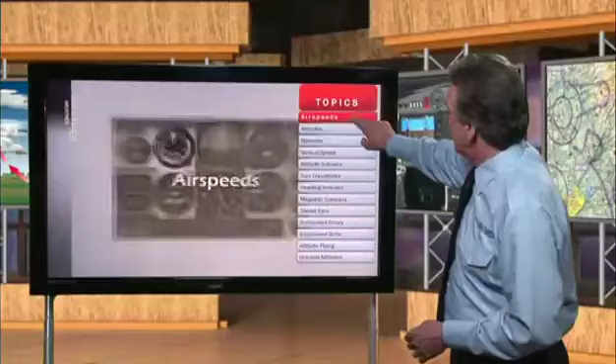We'll cover these topics: airspeeds, altitudes, altimeter, vertical speed, attitude indicator, turn coordinator, heading indicator, magnetic compass, slave gyro, instrument errors, instrument skills, attitude flying, and unusual attitudes. Okay, let's move into the classroom with our first topic: airspeeds. Join your instructor now.

Hi, I'm Robert Bremer, your instructor for this lesson on flight instruments. Flight instruments are the key component of IFR flight. In fact, flight in IMC would be impossible without these instruments. The first instrument we'll discuss is the airspeed indicator. It's part of the pitot-static system, which we'll discuss in greater detail later. Here we have a simplified diagram of the pitot-static system to which the airspeed indicator is connected. The airspeed indicator is connected directly to the pitot tube.

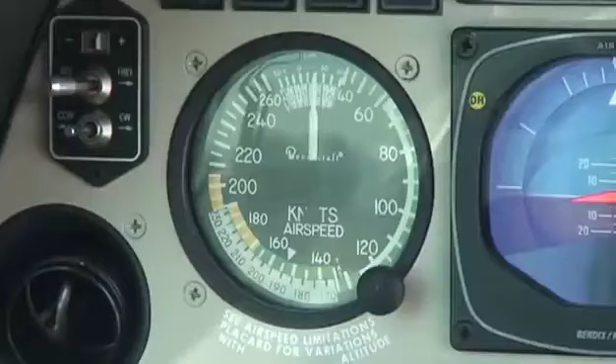So let's take a look at the inner workings of an airspeed indicator. The ram air enters the pitot tube and pressurizes this diaphragm. The diaphragm drives airspeed indicator hands through a mechanical coupling consisting of a long lever and this sector gear. So let's take a look at some common types of airspeed indicators that are found in general aviation airplanes. First is a true airspeed indicator, like the one you see here. A true airspeed indicator allows the pilot to correct indicated airspeed for non-standard temperature and pressure.

Next is a maximum allowable airspeed indicator with a movable pointer indicating the never exceed speed, which changes with altitude. And finally, we have a Mach meter, which shows the ratio of the true airspeed to the speed of sound the aircraft is flying. So let's take a look at some definitions of a typical airspeed indicator. We'll take a closer look at the color coding.

You'll notice that there's a series of color-coded arcs on the airspeed indicator. There's a white arc, green, yellow, and then we have this red line right here. These are airspeed limitation ranges or operating limits of your airplane. Depending upon what airplane you fly, the arcs may shift to different airspeeds, but you'll see these colored arcs on each and every airplane you fly.

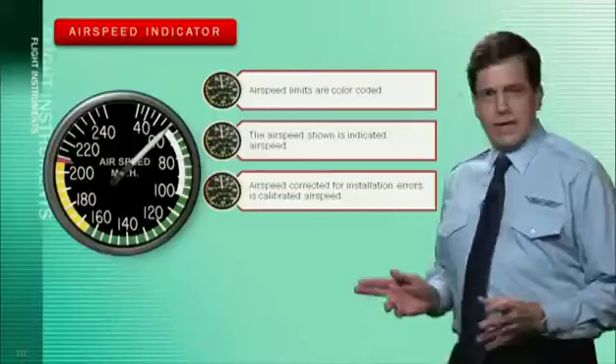Indicated airspeed is that speed that's read directly from the airspeed indicator. Now, airspeed that is corrected for installation and instrument error is called calibrated airspeed. And true airspeed is calibrated airspeed that's corrected for variations in temperature and pressure. And finally, the Mach number is that ratio of true airspeed to the speed of sound. Let's study airspeed limitations. The white arc, which you see right here, represents the flap operating range.

At the bottom of the white arc, or at the lower speed, is the airspeed limitation called VSO. The V stands for velocity, or speed, and the S stands for stalling, and the O stands for a certain configuration. In this case, that configuration is the lowest possible airspeed you can have with the flaps and landing gear down, or in the landing configuration. Below this airspeed, in the landing configuration, the airplane will stall.

Now we also have VS1. V is for velocity, S is for stall, but this is configuration 1, meaning the flaps are up, or in a clean configuration. If you fly below this airspeed with your flaps still up, the airplane will stall. Remember: VS1 is a stalling speed in a clean configuration, or stuff in. VSO is a stalling speed in a landing configuration with flaps and gear down, or stuff out.

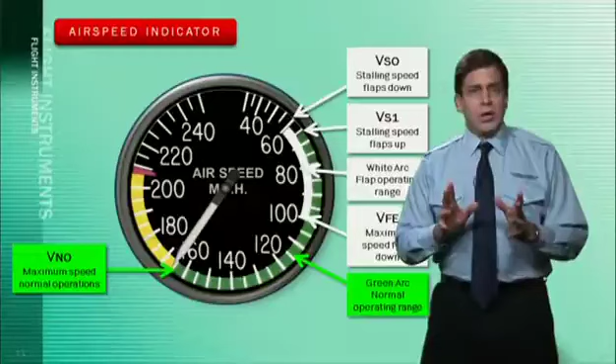We also have this green arc, which represents the normal operating range. At the top of the green arc is VNO, the highest airspeed you should fly under most operating parameters. You can, from time to time, fly into the yellow arc if the air is very smooth, but just like a street light, remember yellow means caution. If the air is bumpy, you want to reduce your speed to fly in the green arc.

The yellow arc represents caution. Operating in this range requires caution, and as mentioned earlier, you should only fly at these speeds in smooth air. At the very top of the yellow arc is the red line, right here. This is VNE: V for velocity, N for never, and E for exceed. Never exceed speeds above this red line can be very dangerous. If you fly above this speed, you risk the likelihood of structural damage to the airplane.

There are also some airspeed limitations that are not marked on the airspeed indicator, but you need to know them just the same.

VA is maneuvering speed. Maneuvering speed is that speed at which you may move the flight controls to their maximum fore and aft deflection and not produce any structural damage to the airplane. VA, or maneuvering speed, can be found in the pilot's operating handbook for the particular airplane that you're flying.

Another airspeed limitation not depicted on the airspeed indicator is VLE, the maximum landing gear extension speed. This is the maximum speed at which you can safely lower the landing gear if you have an aircraft with retractable landing gear. Again, this speed is found in the pilot's operating handbook.

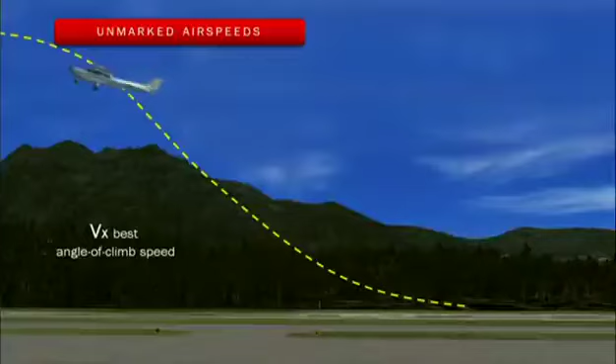Let's take a look at an example. Here our airplane is rolling for departure, but you'll notice there's a group of trees at the end of the runway. If you have an obstruction at the end of the runway, you need to make sure you can climb out at VX, the best angle of climb speed. This airspeed allows the airplane to gain the greatest amount of altitude in a given distance.

Now here's an example of VY speed. When your objective is to gain the most altitude over a given unit of time, you use VY. Generally, once you've cleared the obstructions, you can use VY, the best rate of climb.

Okay, let's take a break right now for a review question. This one: what information does a Mach meter present? Have a look at A, B, or C as your answer.

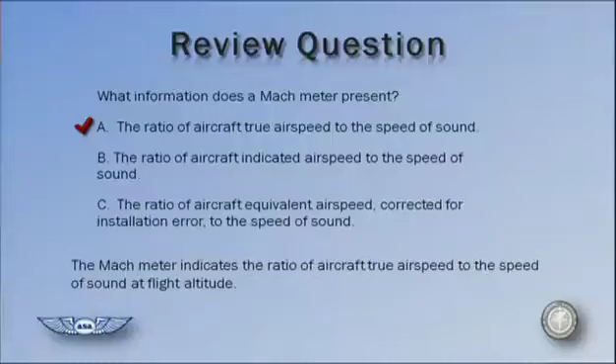Well, the answer in this case is A. The Mach meter indicates the ratio of aircraft true airspeed to the speed of sound at flight altitude.

Okay, let's move along to another topic: altitudes. Back into your classroom to join your instructor. Our flight altitudes are an important aspect in both VFR and IFR operation. Aviators define altitudes based on a number of factors determined by both physical properties and regulations. In this section, we'll study types of altitudes.

Let's talk about the various types of altitudes. Here's an overview of the various altitudes you need to know: there is indicated altitude, then pressure altitude, followed by true altitude, density altitude, and finally absolute altitude. Let's cover these in greater detail.

We'll start with indicated altitude. Indicated altitude is simply the altitude that's shown on the face of your altimeter.

Remember this: atmospheric pressure decreases an inch for every 1,000 foot altitude increase. So if our altimeter is set to 29.15 inches and a new altimeter setting of 29.85 inches is entered, representing a change of 0.7 of an inch, this equals a change in altitude of 700 feet.

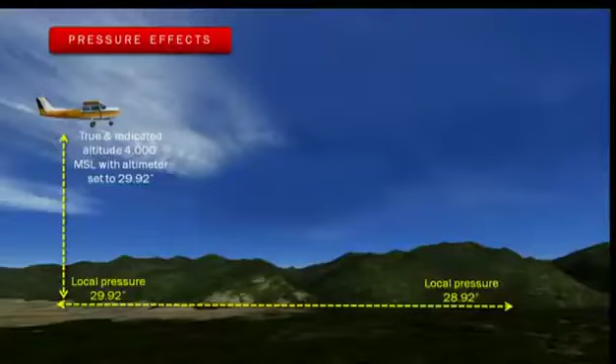In the first case, the local pressure and altimeter setting agree, with a true and indicated altitude of 4,000 feet. As the aircraft flies toward the lower pressure, but without resetting the altimeter, the indicated altitude and true altitude differ by 1,000 feet. So you want to remember the wise old saying: when flying from high to low, look out below.

A correctly calibrated pressure altimeter indicates true altitude above mean sea level, or MSL, when operating within the International Standard Atmosphere, or ISA, parameters of pressure and temperature. Non-standard pressure conditions are corrected by applying the local area altimeter setting.

Next, let's take a look at true altitude. True altitude is the vertical distance of the airplane above mean sea level, or MSL. Airports, terrain, and obstacle elevations on aeronautical charts are true altitudes.

Density altitude is pressure altitude corrected for non-standard temperature, which is 59 degrees Fahrenheit. Since you'll often be flying in non-standard conditions, you need to know and understand density altitudes and how they affect your airplane's performance.

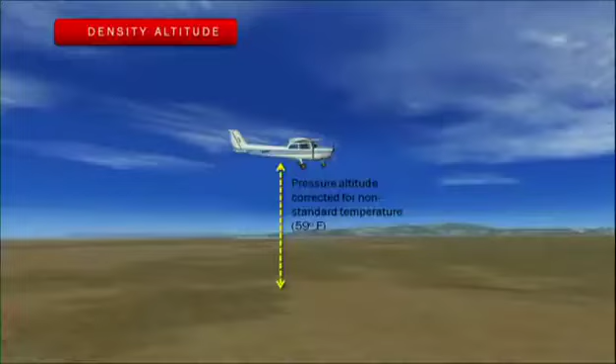Absolute altitude is the vertical distance of your airplane above ground level, or AGL.

When the aircraft is flying in air that is warmer than standard, the air is less dense, and the pressure levels are further apart. When the aircraft is flying at an indicated altitude of 5,000 feet, the pressure level for that altitude is higher than it would be in air at standard temperature, and the aircraft is also higher than it would be if the air were cooler. If the air is colder than standard, it is denser, and the pressure levels are closer together. True altitude is higher than indicated altitude whenever the temperature is warmer than ISA.

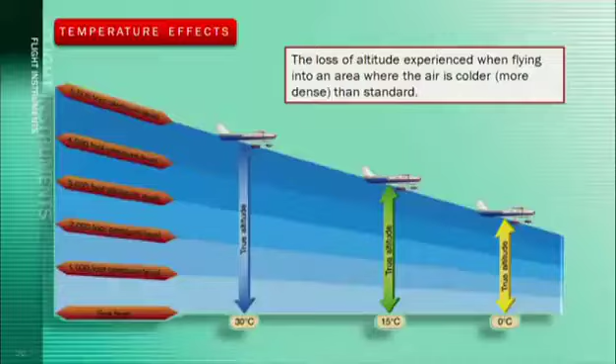Now in this example, let's assume we are flying in temperatures outside of ISA parameters. Here we're flying with an indicated altitude of 10,000 feet. The local pressure remains at the standard condition of 29.92 inches. We're flying in warmer than standard air. Because the air is less dense and the pressure levels are further apart, the altimeter reads 10,000 feet, but the true altitude is 11,000 feet.

The cold temperature-induced altimeter error may be significant when considering obstacle clearances when temperatures are well below standard. You may want to increase your minimum terrain clearance altitudes, with a corresponding increase in ceiling from the normal minimum, when flying in extreme cold temperature conditions.

Now, if compensation is applied, ATC must be informed that the aircraft is not flying the assigned altitude. Otherwise, vertical separation from other aircraft could be reduced, creating a potentially very hazardous situation.

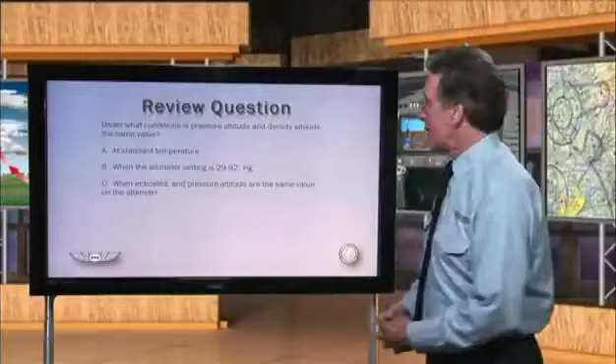Okay, let's take a look at a couple of review questions this time. First, under what conditions is pressure altitude and density altitude the same value? Which of these three?

Your answer, of course, is A. Density altitude is pressure altitude corrected for non-standard temperature. Under standard atmospheric conditions, each level of air in the atmosphere has a specific density, and under standard condition, pressure altitude and density altitude identify the same level.

Okay, let's take that second question. Under what condition will true altitude be lower than indicated altitude with an altimeter setting of 29.92 inches of mercury? Which of these, A, B, or C?

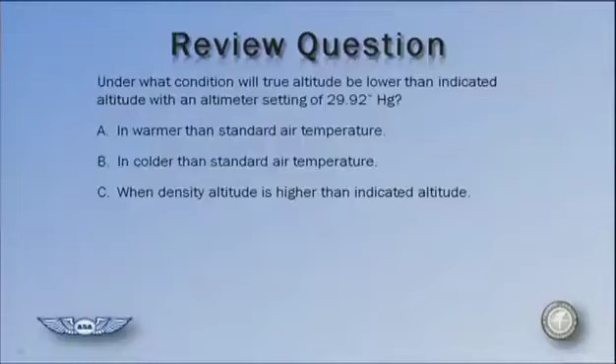The correct answer here is B, colder than standard air temperature. Effects of non-standard conditions can result in a difference of as much as 2,000 feet between true and indicated altitude on a cold day. So there you have it.

In this section, we study the altimeter as we find it in your instrument panel. It displays the altitude at which the aircraft is actually located, flying or otherwise. We'll learn its physical characteristics and how it's used. Next, let's take a look at the altimeter.

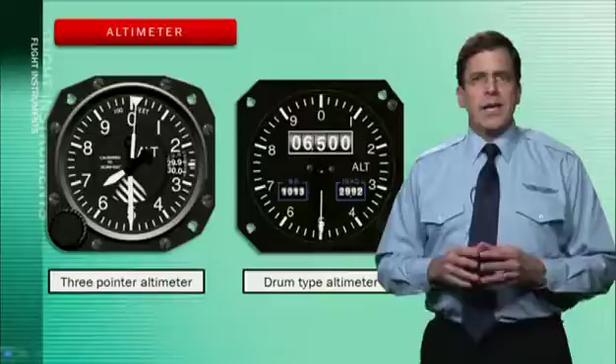Let's take a closer look at the altimeter. This little cut right here is called the Kollsman window, and it displays the altimeter setting. For example, if you departed from a controlled airport that has either a tower, ASOS, or ATIS information, you dial the altimeter setting in right here using this little knob.

If you're departing from an airport that does not have these services, you turn the dial to the field elevation from which you are departing. This will give you a fairly accurate barometric pressure indication.

Now, to preflight the altimeter, the current reported altimeter setting should be set in the Kollsman window. You would note any variation between the known field elevation and the altimeter indication. If the variation exceeds plus or minus 75 feet, the accuracy of the altimeter is questionable, and the problem should be referred to an appropriately rated repair station for evaluation and possible correction.

Let's take a closer look at the altimeter pointers. Aside from incorrectly setting an altimeter, one of the most common errors is simply misreading it. Now, just like a wristwatch, we have three hands, but instead of hours, minutes, and seconds, we have a 10,000 foot indicator, a 1,000 foot hand, and a 100 foot hand.

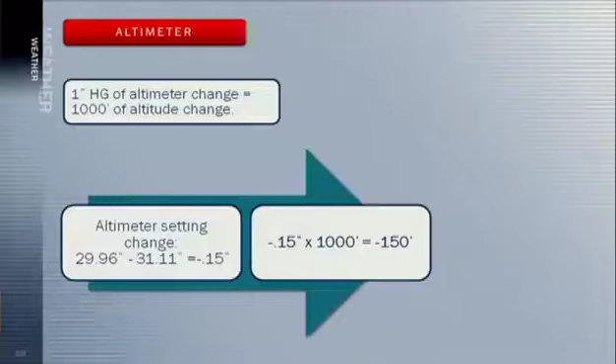First, when an altimeter is changed from 30.11 inches of mercury to 29.96 inches of mercury, in which direction will the indicated altitude change, and by what value? Which of these three, A, B, or C, is correct? Well, in order to get there, we have to do a little math. Given that 1 inch of mercury of altimeter change equals 1,000 feet of altitude change, we take 30.11 inches away from 29.96 inches, we arrive at negative 0.15 inches. We multiply that by 1,000 feet, we get negative 150 feet. Going back to our question, the correct answer is B: the altimeter will indicate 150 feet lower.

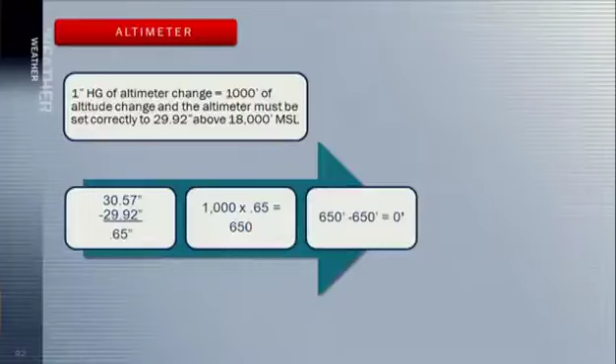All right, let's move along to the second one. En route at flight level 290, the altimeter is set correctly but not reset to the local altimeter setting of 30.57 inches of mercury during descent. If the field elevation is 650 feet and the altimeter is functioning properly, what is the approximate indication upon landing? Okay, which of these three? I'm going to have to do some more math. Given 1 inch of mercury of altimeter change equals 1,000 feet of altitude change, and given the altimeter must be set correctly to 29.92 inches above 18,000 feet MSL, we take 29.92 inches away from 30.57 inches, we come up with 0.65 inches. Multiply that by 1,000 feet, we get 650 feet. Taking away our field elevation of 650, our answer is C, sea level. Given the altimeter was not set to the field elevation pressure, the altimeter will read sea level, or 0 feet.

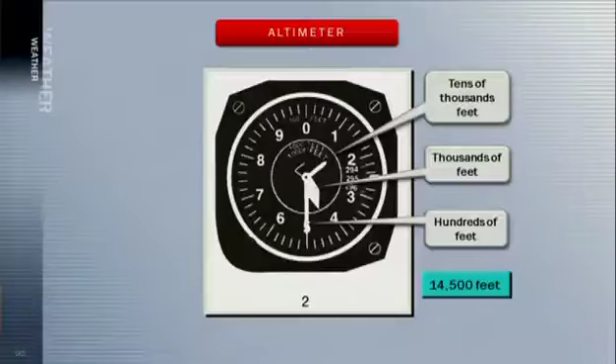14,500 feet, correct. Let's go back to our question. The answer then is C. It should be 14,500 feet, and that is correct. Okay, moving on to another topic.

Vertical speed is the topic. We'll go back to your classroom and your instructor. Next up is the VSI, or vertical speed indicator. It's also called a vertical velocity indicator, or VVI, and was formerly known as a rate of climb indicator. It's a rate of pressure change instrument that gives an indication of any deviation from a constant pressure level. The vertical speed indicator, or VSI, is also part of the pitot-static system. It's connected to the static side of the system.

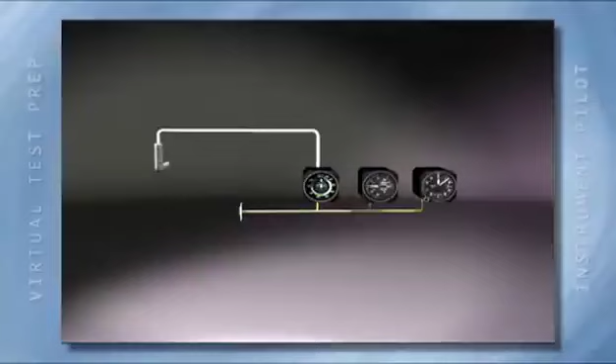The VSI, formerly known as a rate of climb indicator, is a rate of pressure change instrument that gives an indication of any deviation from a constant pressure level. The vertical speed indicator measures the rate of climb or descent in hundreds of feet per minute: 500, 1,000, 1,500, or minus 500, minus 1,000, minus 1,500, and so on. Although not required by regulation to be on board, the VSI is commonly found on instrument-equipped airplanes. To pre-flight the VSI, you would check to make sure that there's a 0 reading prior to takeoff. If it's indicating a climb or descent, you would note the error and apply it to the readings in flight.

The VSI, or rate of climb indicator, is a very sensitive altimeter with a calibrated leak in the case. Inside the instrument case is an aneroid very much like the one you would have in an airspeed indicator. Now, both the inside of this aneroid and the inside of the instrument case are vented to the static system. But the case is vented through a calibrated orifice that causes the pressure inside the case to change more slowly than the pressure inside the aneroid. It uses the static source as the sensor.

As the aircraft ascends, the static pressure decreases. The pressure inside the case compresses the aneroid, moving the pointer upward, showing a climb and indicating the rate of ascent in number of feet per minute, or FPM. When the aircraft levels off, the pressure no longer changes. The pressure inside the case becomes equal to that inside the aneroid, and the pointer returns to the horizontal or 0 position. When the aircraft descends, the static pressure increases and the aneroid expands. This moves the pointer downward, indicating a descent.

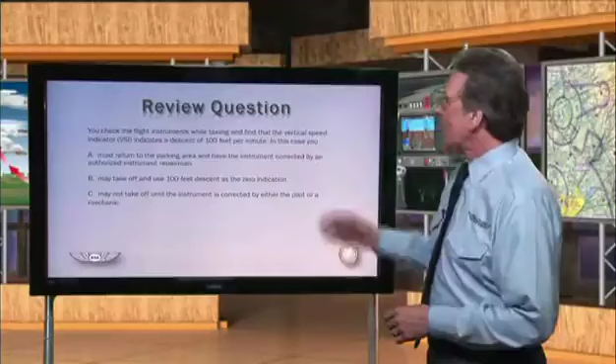Welcome back. Let's take on another review question for you. You check the flight instruments while taxiing and find that the vertical speed indicator, or VSI, indicates a descent of 100 feet per minute. In this case, you would take which of these actions, A, B, or C?

And your answer? B. The VSI should indicate 0 plus or minus 100 feet on the ground. Okay, moving along to another topic.

This time out, attitude indicator. We ask you to join your instructor in the class. Flight without reference to a visible horizon can be safely accomplished by the use of gyroscopic instrument systems and the 2 characteristics of gyroscopes, which are rigidity and precession. These systems include attitude, heading, and rate instruments along with their power sources. These instruments include the attitude indicator, turn coordinator, and the heading indicator.

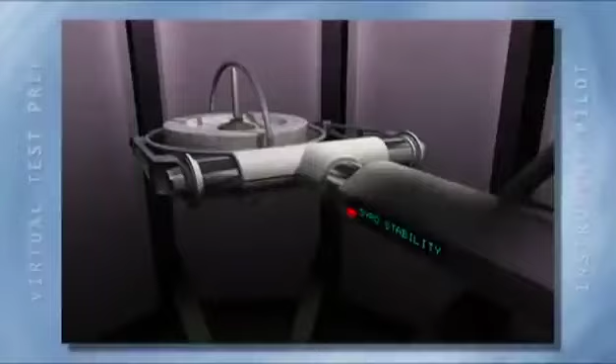A gyroscope, or gyro, is a small wheel with its weight concentrated around the periphery. When this wheel is spun at very high speeds, it becomes rigid and resists tilting or turning in any direction other than around its spin axis. It takes on a property called rigidity in space. Because of this effect, the gyro does not tip but stays upright.

When the gyroscope is mounted inside a gimbal device, that gimbal mechanism is moved around its 3 axis points. The gyro will still stay rigid. When this gyro is mounted in an aircraft, the gyro remains rigid in space and the aircraft rotates around it. In the airplane, the instrument will have a constant reference in space as the airplane pitches, rolls, and yaws around it. Attitude and heading instruments operate on the principle of rigidity.

Now, rate indicators, such as turn indicators and turn coordinators, operate on the principle of precession. The gyro precesses, or rolls over, proportionate to the rate the aircraft rotates about one or more of its axes. Here is a spinning gyro. As force is applied to this point right here with the red dot, the force advances 90 degrees, and that's where it's applied. And this causes the gyro to tilt in that direction.

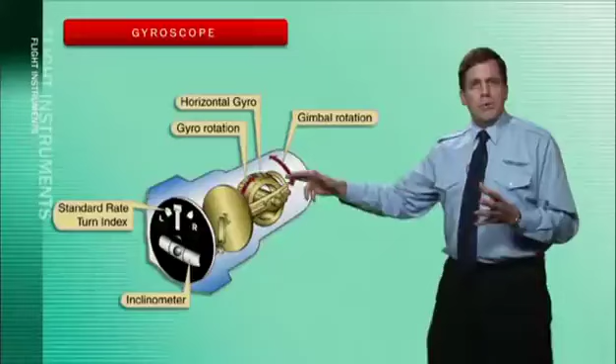Pneumatic gyros are driven by a jet of air impinging on buckets that are cut into the periphery of the wheel, as shown on this turn and slip indicator. On many aircraft, this stream of air is obtained by evacuating the instrument case with a vacuum source and allowing filtered air to flow into the case through a nozzle to spin the wheel.

Aircraft that do not have a pneumatic pump to evacuate the instrument case can use venturi tubes that are mounted on the outside of the aircraft, similar to the system that we see here. Air flowing through this venturi tube accelerates in the narrowest part, and according to Bernoulli's principle, the pressure drops. Now that location up there at the point of the venturi is connected to the instrument case by a piece of tubing.

The two attitude instruments operate on approximately 4 inches of mercury of suction. The turn and slip indicator, however, only needs 2 inches of mercury, so a pressure reducing needle valve is used to decrease the suction. Air flows into the instruments through filters built into the instrument cases. Now in this system here, we have a problem. Ice can clog the venturi tube and stop the instruments when they're most needed.

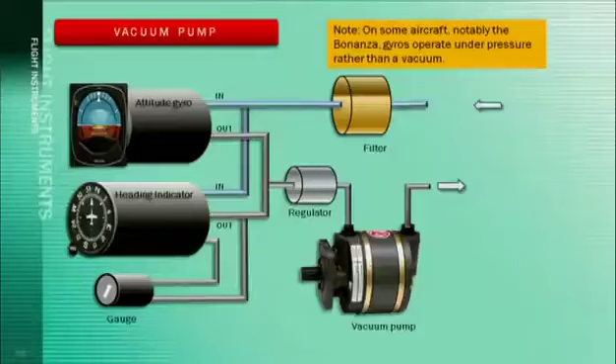So here's a typical vacuum pump system. This vacuum pump pulls air into and out of the gyro instruments. The vacuum pump is driven by the engine of the airplane. The air is pulled through a filter, and it comes out of the filter and then moves into the heading and attitude indicators. The air flows through the instruments and is evacuated through a regulator. The regulator maintains a constant rate of vacuum pressure moving into and through these instruments.

This gauge right here that you see on your instrument panel indicates how much vacuum pressure is applied to these instruments and being generated by your vacuum pump. After the air moves from the regulator and goes into the pump, it's vented overboard the airplane.

Now, there are other types of systems used in other aircraft. In some systems, instead of a vacuum, pressure drives the instruments. There's a pressurization system which is used on Bonanza aircraft as an example. A third type of gyro-driven instrument that's come out in recent years doesn't even use any of this. It's called a solid-state gyro.

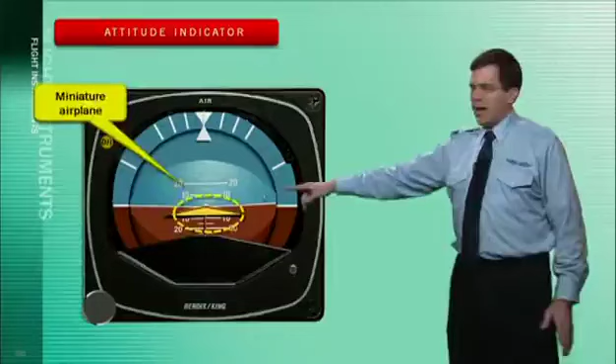What we see here is the business end of our attitude indicator, or artificial horizon. This is the face of the instrument. We have a miniature airplane, and it has wings, and they're indicating along this horizon. You can adjust the airplane up and down on the horizon with this little knob. Turning the knob allows you to align the miniature airplane with the horizon in the instrument.

A pre-takeoff check verifies that the horizon bar stabilizes within 5 minutes and does not dip more than 5 degrees during taxiing turns. These marks up here indicate bank angle from 0 degrees all the way over to a full 90 degrees of bank. Now, that's the attitude indicator, or artificial horizon.

The attitude indicator provides an immediate, direct, and corresponding indication of any change of aircraft pitch and bank attitude. This pitch and bank depiction is in relation to the natural horizon. It's the pilot's primary instrument during transitions of pitch. The attitude indicator is subject to some errors that you need to know about.

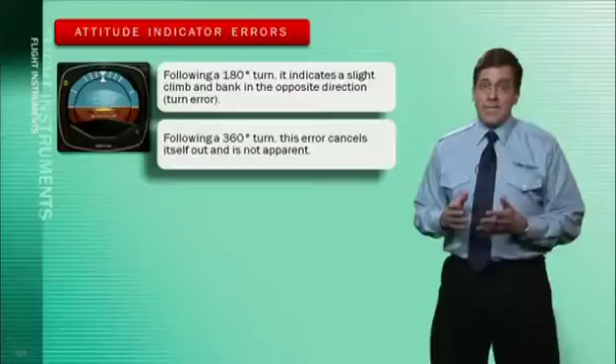These are: following a 180-degree turn, it indicates a slight climb and bank in the opposite direction. That's called turn error. Now, following a 360-degree turn, this error cancels itself out and it's not apparent. Also, during acceleration, the horizon bar moves down, indicating a climb. This is acceleration error. During deceleration, the horizon bar moves up, indicating a descent. That's deceleration error. Now let's take a look at some examples.

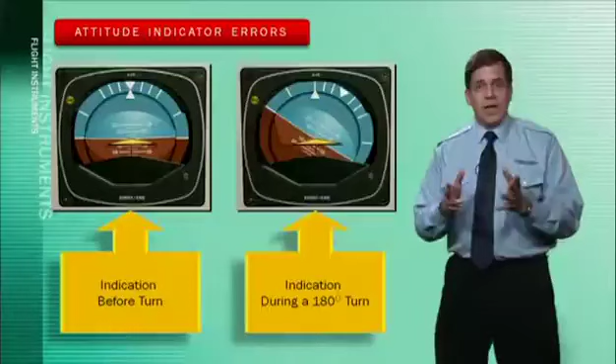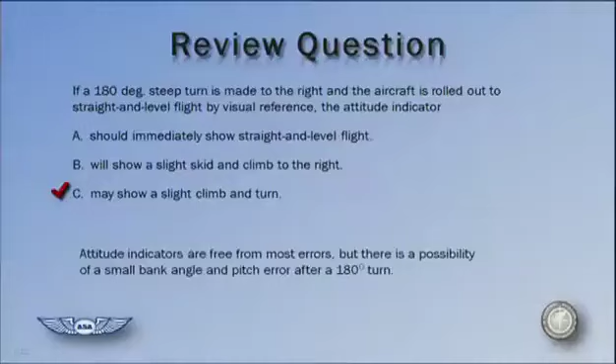If a 180-degree steep turn is made to the right and the aircraft is rolled out to straight and level flight by visual reference, the attitude indicator A, B, or C? And your answer is C. Attitude indicators are free from most errors, but there is a possibility of a small bank angle and pitch error after a 180-degree turn. Okay, let's move along.

Another topic. This one, turn coordinator. Back to your classroom. The next instrument that uses a gyroscope is the turn indicator. Before we discuss the turn coordinator instrument in detail, it's a good time to review the turning forces. Remember, an airplane turns because of the horizontal component of lift. The greater the horizontal lift, the greater the rate of turn.

In a turn, the angle of attack must be increased to maintain altitude. With reduced airspeed, you would decrease the bank angle or increase the angle of attack to maintain level flight. In a constant bank, airspeed increase results in a decrease in turn rate and an increase in radius. Check this animation. As the airplane enters the turn, a number of force vectors are created.

There's the vertical component of lift. There's a horizontal component of lift, followed by the centrifugal component of lift. These forces combine to create the resultant lift vector. Finally, remember that the load factor is the ratio between the resultant lift and the aircraft's weight.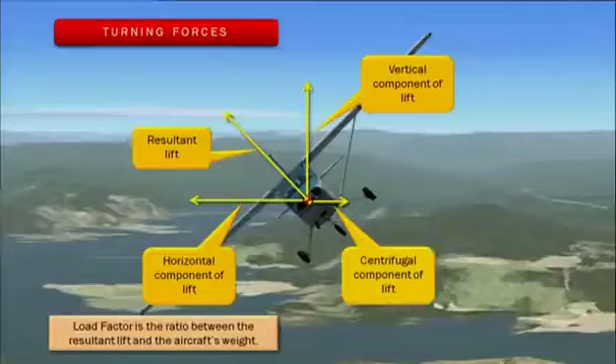The bezel of the instrument is marked to show wings level flight and bank angles for a standard rate turn. It's gyroscopically operated, designed to show roll rate, rate of turn, and quality of turn. It acts as a backup system for the vacuum-powered attitude indicator. Before engine start, the turn needle should be centered. During a taxiing turn, the needle indicates a turn in the proper direction and the ball shows a skid. The turn coordinator provides both yaw and bank information.

The little miniature airplane provides only an indirect indication of roll, responding with the airplane's banking action in some cases even before the turn can actually commence. However, in this case, the ratio of the turn is not 1-to-1 with the horizon like it is on the attitude indicator. This means that in a 30-degree bank turn, the miniature airplane will show a bank on the turn coordinator, but it may not show up as a 30-degree bank.

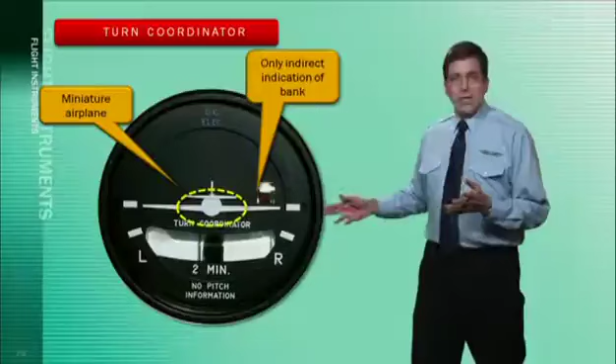At the bottom of the instrument is a little fluid-filled tube and ball. A turn coordinator does not sense pitch. This is indicated on some instruments by placing the words "no pitch information" on the dial. Now the inclinometer down here is called a coordination ball, which shows the relationship between the bank angle and the rate of yaw. In a coordinated turn, horizontal lift and centrifugal force are equal.

In a skid, the rate of turn is too great for the angle of bank and the ball moves to the outside of the turn. To correct this condition, increase the bank or decrease the rate of turn. The turn is coordinated when the ball is in the center, between the marks. The aircraft is skidding when the ball rolls toward the outside of the turn and is slipping when it moves towards the inside of the turn.

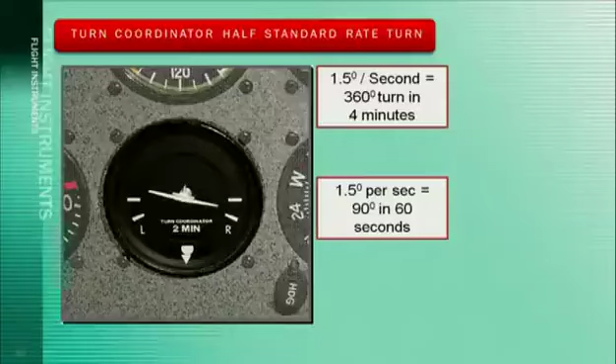Now, a standard rate of turn is 3 degrees per second. It takes 1 minute to complete a 180-degree turn. A half standard rate turn is 1.5 degrees per second. That takes 4 minutes to complete a 360-degree turn, or it takes 60 seconds to complete a 90-degree turn.

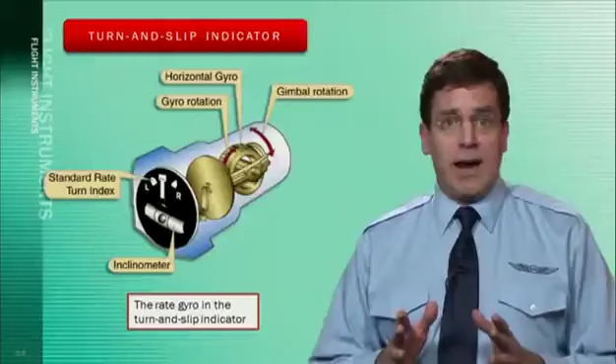The turn and slip indicator is a small gyro spun either by air or by an electrical motor. Note the horizontal gyro, gyro rotation, gimbal rotation, the standard rate turn index, and the inclinometer. The gyro is mounted in a single gimbal with its spin axis parallel to the lateral axis of the aircraft and the axis of the gimbal parallel with the longitudinal axis. The turn and slip indicator indicates yaw, but not roll.

Okay, this is a good time to review with a couple of questions what you just learned. If a standard rate turn is maintained, how long would it take to turn 180 degrees? Which of these is true and correct, A, B, or C? The answer is A. 3 degrees per second times 60 seconds equals 180 degrees. All right, question number 2.

What indication is presented by the miniature aircraft of the turn coordinator? Which of these is correct? Your answer? A. The miniature aircraft depicts an indirect indication of the bank attitude. Okay, selecting a new topic.

We're down to heading indicator, and we're back in your classroom for that topic. Next up, the heading indicator. The heading indicator is the final gyroscopic instrument. It basically provides the same information as the magnetic compass, but in a much better way. It does, however, require that it be set to match the magnetic compass.

Here we go. The last gyro instrument is the heading indicator. It looks very similar to a compass. The heading indicator shows the direction the nose of the airplane is heading. In this case, we're heading 341 degrees. The heading indicator is much easier to read than a magnetic compass using a heading adjustment knob. The heading indicator consists of a pictorial representation of an airplane that's moving along the compass rose.

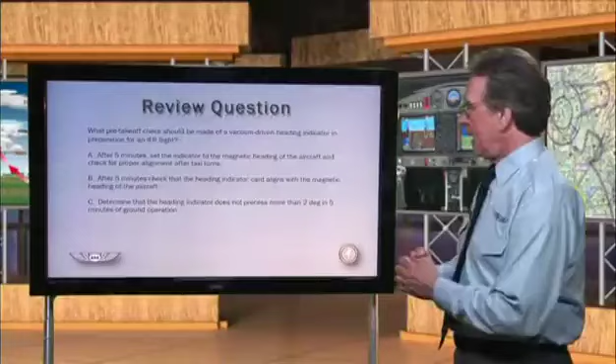Okay, back into the studio for a review question. What pre-takeoff check should be made of a vacuum-driven heading indicator in preparation for an IFR flight? Which of these is your correct answer? And our answer is A. After 5 minutes, set the indicator to the magnetic heading of the aircraft and check for proper alignment after taxi turns. Very good. Moving along, yet another topic.

We are down to magnetic compass. We ask you to join your instructor in the classroom. The last instrument we're going to study is the magnetic compass. The magnetic compass is not a pressure-driven or gyro-powered instrument, but it is perhaps the most important instrument there is. You have to know where you're going. The magnetic compass does, however, suffer from error tendencies.

As you know, the Earth has geographic and magnetic poles. Lines of magnetic force stretch between the north and the south magnetic pole. These lines of force are sensed by the magnetic compass. The magnetic compass points towards magnetic north. All general aviation aircraft are equipped with a magnetic compass.

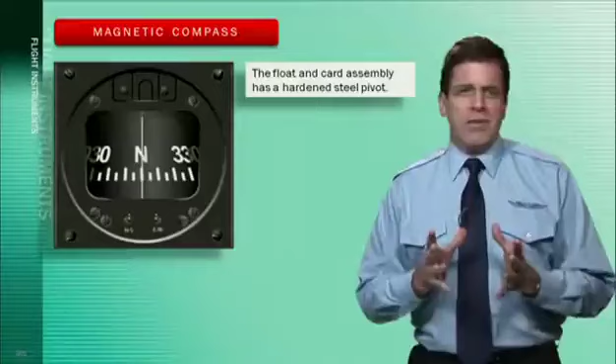The float and card assembly has a hardened steel pivot in its center that rides inside a special spring-loaded hard glass jewel cup. The buoyancy of the float takes most of the weight off the pivot, and the fluid damps the oscillation of the float and card. This jewel and pivot type mounting allows the float freedom to rotate and tilt up to approximately 18 degrees angle of bank. At steeper bank angles, the compass indications are erratic and unpredictable.

The compass housing is entirely full of compass fluid. To prevent damage or leakage when the fluid expands and contracts with temperature changes, the rear of the compass case is sealed with a flexible diaphragm or with a metal bellows in some compasses. The magnets align with the Earth's magnetic field, and the pilot reads the direction on the scale opposite the lubber line, which is this vertical line right here.

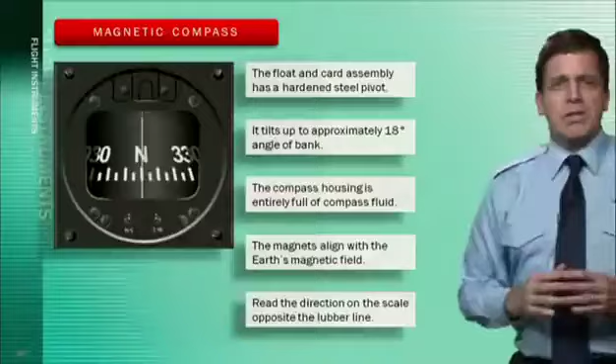A compensator assembly mounted on the top or the bottom of the compass allows an aviation maintenance technician, or AMT, to create a magnetic field inside the compass housing that cancels the influence of local outside magnetic fields. This is done to correct for deviation error. The compensator assembly has two shafts with ends that have screwdriver slots that are accessible from the front of the compass. Each shaft rotates one or two small compensating magnets.

The end of one shaft is marked EW, and its magnets affect the compass when the aircraft is pointed east or west. The other shaft is marked NS, and its magnets affect the compass when the aircraft is pointed north or south. Now, next up are compass errors.

Let's start with acceleration errors. First, assume that you're in the northern hemisphere and the airplane is on an east or west heading. The compass will swing to the north while you accelerate and then return to the correct heading. If the aircraft accelerates on a heading of east, the inertia of the weight holds its end of the float back and the card rotates towards the north.

As soon as the speed of the aircraft stabilizes, the card swings back to the east indication. If, while flying on this easterly heading, the aircraft decelerates, the inertia causes the weight to move ahead and the card rotates toward south until the speed again stabilizes.

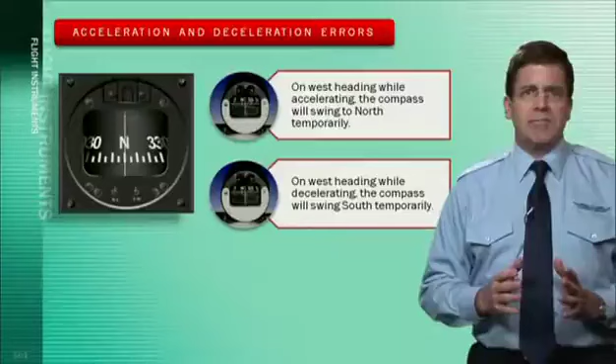So there's an acronym for this. Remember ANDS, which stands for accelerate to the north, decelerate to the south.

It occurs only on easterly or westerly headings. The compass will indicate correctly when accelerating on north or south headings.

Next, there are turning errors. The lines of magnetic flux leave the Earth at the magnetic North Pole and enter at the magnetic South Pole. At both locations, the lines are perpendicular to the Earth's surface. At the magnetic equator, the lines are parallel with the surface. The magnets in a compass align with this field, and near the poles, they dip or tilt.

They tilt the float in the card. The float is balanced with a small dip compensating weight, so it stays relatively level when operating in the middle latitudes of the northern hemisphere. This dip, along with this weight, causes two very noticeable errors: northerly turning error and acceleration error.

The pull of the vertical component of the Earth's magnetic field causes northerly turning error, which is apparent on a heading of north or south.

When an aircraft flying on a north heading makes a turn toward east, the aircraft banks to the right. This causes the compass card to tilt to the right. The vertical component of the Earth's magnetic field pulls the north-seeking end of the magnet to the right, and the float rotates, causing the card to rotate toward west, the direction opposite the direction the turn is being made.

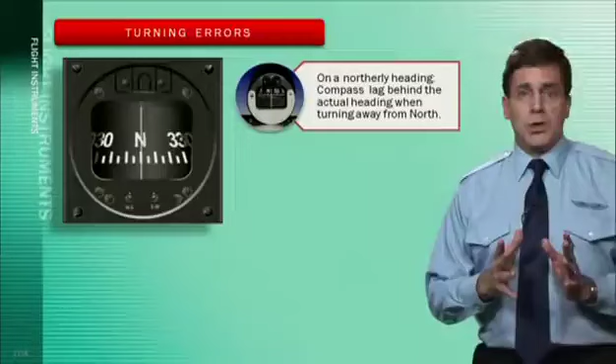This northerly turning error is based on the aircraft heading north. The compass will want to remain pointing north toward the North Pole when turning away from a northerly heading. The compass will lag or possibly even indicate a turn in the opposite direction during the first part of the turn. When you reach an east or west heading, it catches up and reads correctly.

But as you continue with a turn to the south, the compass starts to race ahead of that turn. In fact, to roll out on a south heading, you have to turn past the heading on the compass, overshooting a bit to the north.

So there's an acronym for this. Just remember OSUN, which stands for overshoot south, undershoot north.

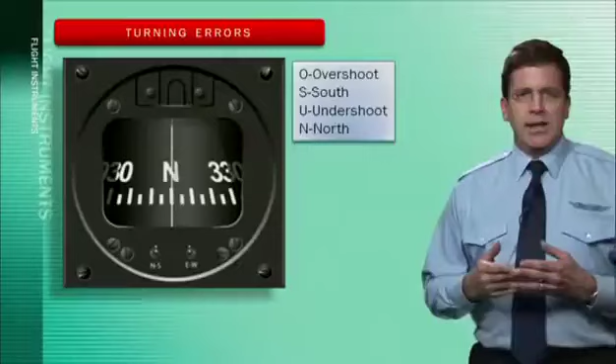In the mid-latitudes, maybe as much as 30 degrees is reasonable for overshoot or undershoot when turning to the north or south heading. Again, to summarize, when turning to the south, the compass indication will lead. When turning to the north, the compass indication lags.

Deviation is the compass error caused by magnetic disturbances from electrical and metal components in the aircraft. The correction for this error is displayed on a compass correction card placed near the magnetic compass in the aircraft.

Variation is the angular difference between the true or geographic poles and the magnetic poles at a given point. The compass magnet is aligned with the magnetic poles, while aeronautical charts are oriented to the geographic poles. The variation must be taken into consideration when determining an aircraft's actual geographic location.

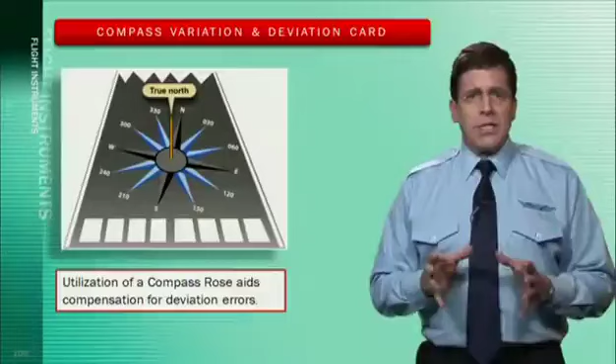Many airports have a compass rose painted on a specific place on the airport's surface, allowing for compensation of deviation errors. A compass correction card prepared by the pilot operator provides heading correction caused by variation and/or deviation, and it could look like this here.

The dial of this compass is graduated with letters representing the cardinal directions, north, east, south, and it's got numbers every 30 degrees and marks every 5 degrees.

The dial is rotated by a set of gears from the shaft-mounted magnet, and the nose of the symbolic airplane on the instrument glass represents the lubber line for reading the heading of the aircraft from the dial. Eddy currents induced into an aluminum damping cup damp any oscillation of the magnet.

Back for another review question. When flying in the northern hemisphere, if an aircraft is accelerated or decelerated, the magnetic compass will normally indicate which of these, A, B, or C?

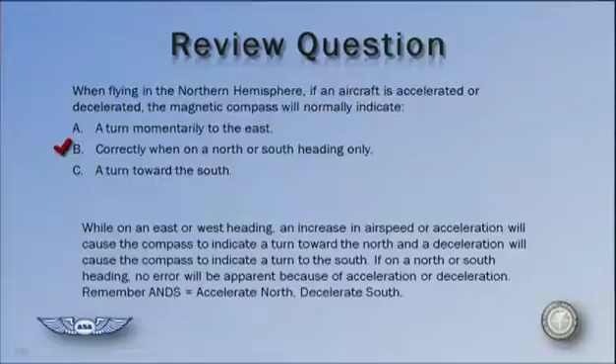Your answer is B. While on an east or west heading, an increase in airspeed or acceleration will cause the compass to indicate a turn toward the north, and a deceleration will cause the compass to indicate a turn toward the south. If on a north or south heading, no error will be apparent because of acceleration or deceleration. Remember, ANDS: Accelerate North, Decelerate South.

Okay, let's move along to a new topic: slaved gyro. Back to your instructor in the classroom.

The two panel-mounted components of a typical system are the pictorial navigation indicator, the slaving control and compensator unit, and a remote magnetic sensor, also referred to as a flux gate compass sensor.

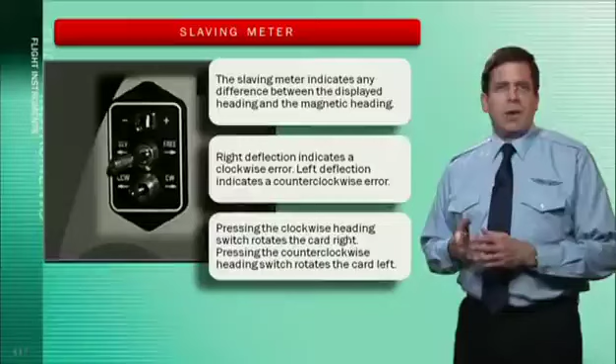The slaving meter indicates any differences between the displayed heading and the magnetic heading. A right deflection indicates a clockwise error of the compass card. A left deflection indicates a counterclockwise error of the compass card. In the free gyro mode, depressing the clockwise manual heading drive button rotates the compass card to the right. Depressing the counterclockwise heading drive button rotates the compass card to the left.

The flux gate compass that drives the slave gyro uses the characteristic of current induction. The flux valve is a small segmented ring made of soft iron that readily accepts lines of magnetic flux. An electrical coil is wound around each of the three legs to accept the current induced in this ring by the Earth's magnetic field. A coil wound around the iron spacer in the center of the frame has 400 Hertz alternating current, or AC, flowing through it.

During the times when this current reaches its peak, twice during each cycle, there is so much magnetism produced by this coil that the frame cannot accept the lines of flux from the Earth's field. But as the current reverses between the peaks, it demagnetizes the frame, so it can accept the flux from the Earth's field. As this flux cuts across the windings in the three coils, it causes current to flow in them.

These three coils are connected in such a way that the current flow in them changes as the heading of the aircraft changes. The three coils are connected to three similar but smaller coils in a synchro inside the instrument case. This synchro in turn rotates the dial on the indicator.

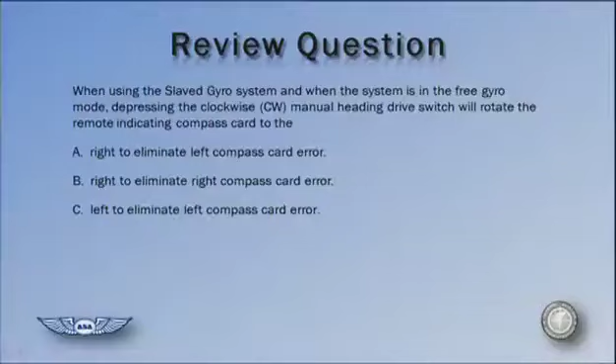Okay, let's take a look at a review question on this topic. When using the slaved gyro system, and when the system is in the free gyro mode, depressing the clockwise CW manual heading drive switch will rotate the remote indicating compass card to A, B, or C.

Your correct answer is A. When the system is in the free gyro mode, depressing the clockwise CW manual heading drive switch will rotate the remote indicating compass card to the right. Okay, there you have it.

All right, let's get to another topic: instrument errors. We take you back to your classroom for a discussion of that topic. While the flight instruments are generally very reliable, they do sometimes fail. It's therefore very important to understand these potential failures to maximize flight safety.

To understand instrument errors, we must first understand the pitot-static system. Pitot pressure, or impact air pressure, is sensed through an open-ended tube pointed directly into the relative wind flowing around the aircraft. This pitot tube connects to pressure-operated flight instruments such as the ASI, or airspeed indicator.

The pitot-static system provides sensors for the altimeter, vertical speed indicator, and the airspeed indicator. Other instruments depend upon accurate sampling of the ambient, still air, atmospheric pressure to determine the height and speed of movement of the aircraft through the air, both horizontally and vertically.

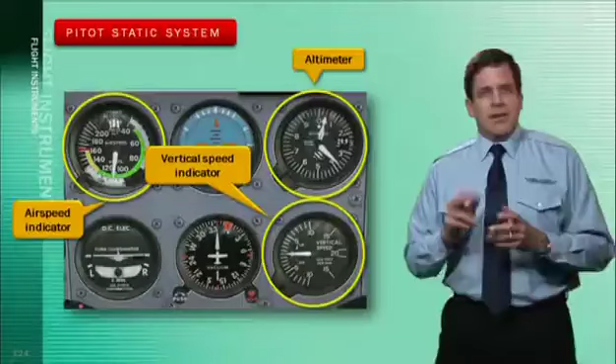This pressure, called static pressure, is sampled at one or more locations outside the aircraft. On some aircraft, the static pressure sensor, which you can see right here, is sensed through flush ports on the side of the fuselage, or the vertical fin. These ports are in locations proven by flight tests to be in undisturbed air, and they are normally paired, one on either side of the aircraft. This dual location prevents lateral movement of the aircraft from giving erroneous static pressure indications.

The pitot tube receives ram air pressure, or impact pressure, which results from air striking the airplane as it moves forward. This ram air pressure moves up into the airspeed indicator. We're also getting information from the static port, which provides the source of air pressure from the ambient air outside and around the aircraft. Ram air pressure is received by the pitot tube and measured by the airspeed indicator, while ambient air pressure is picked up by the static port. It's the difference in these two pressures that shows up as indicated airspeed on your airspeed indicator.

So here's a quick summary. A static port is the source of ambient pressure. The pitot tube provides ram pressure for airspeed indications. The vertical speed indicator, or VSI, measures rate of climb and descent. And the altimeter measures the static air pressure and indicates height above sea level.

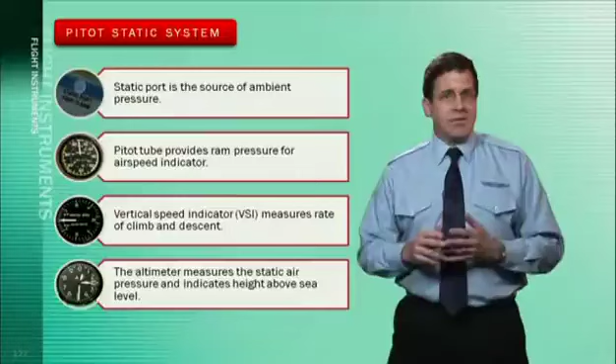Okay, back to instrument errors. Check this table. In the event the pitot tube becomes blocked, say by a bug, dirt, or some kind of debris, you won't get an accurate indication with the airspeed indicator. Instead, this instrument is going to read zero. The altimeter and VSI will work properly.

With a blocked pitot and drain hole, and an open static condition, the airspeed indicator will read high in a climb and low in a descent. Again, the altimeter and VSI will function correctly.

If the static source is blocked and the pitot is open, the airspeed indicator will indicate low in a climb and high in a descent. Both the altimeter and VSI will be frozen.

When the alternate static source is on, the airspeed and altimeter will read high and the VSI will show a momentary climb. Should the VSI glass be broken, the airspeed and altimeter will read high and the VSI will indicate in the reverse direction.

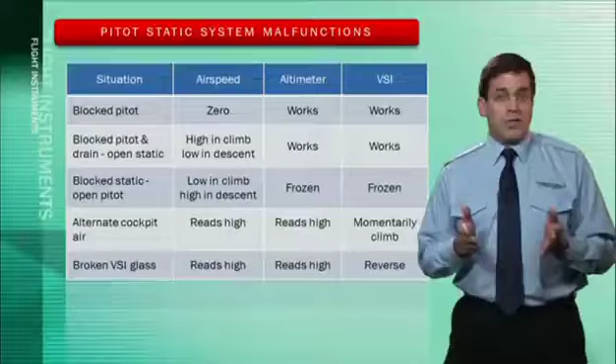Okay, let's cover a review question under this topic. If both the ram air input and the drain hole of the pitot system are blocked, what reaction should you observe on the airspeed indicator when power is applied and a climb is initiated out of severe icing conditions? Which of these is correct, A, B, or C?

Your correct answer is C. If both the ram air, or pitot input, and the drain hole of the pitot system are blocked, and no change occurs until an actual climb rate is established, then indicated airspeed will increase.

All right, good enough. Let's tackle something new. Our next topic: instrument skills. And we send you back into the classroom for that one. Instrument flying proficiency is the single most fundamental skill to ensure a safe and enjoyable flight.

Roger, I'm climbing through 2,300 for 5,000, 9 Golf Romeo. November 9 Golf Romeo, that matched up a little bit better. You are radar contact 1 mile northeast of the Aurora State Airport. Turn left direct Newberg on course. Roger, turn left direct Newberg on course, 9 Golf Romeo.

You can have all the best instruments and electronics in your panel, but without these skills you won't be able to be proficient and competently conduct your next flight. During attitude instrument training, the pilot must develop three fundamental skills involved in all instrument flight maneuvers: instrument cross-check, instrument interpretation, and aircraft control.

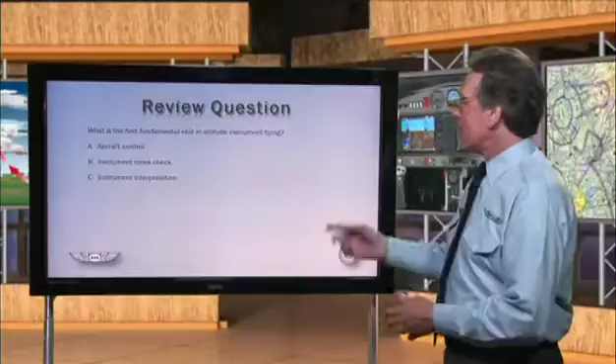Okay, let's take a look at a couple of review questions for you. What is the first fundamental skill in attitude instrument flying? A, B, or C? Your answer is B. The first fundamental skill involved in all instrument flight maneuvers is instrument cross-check.

Okay, moving along to the second question. The rate of descent on the glide slope is dependent upon which of these? Your answer is C. The vertical speed required to remain on the proper glide angle is dependent on the ground speed when flying on a fixed glide slope.

Okay, answers to a couple more questions, moving to a new topic.

Attitude flying. Let's take that one into the classroom for you.

The attitude of an aircraft is controlled by movement around its lateral or pitch, longitudinal or roll, and vertical or yaw axes. In instrument flying, attitude requirements are determined by correctly interpreting the flight instruments. Instruments are grouped by how they relate to control, function, and aircraft performance. Attitude control is discussed in terms of pitch, bank, and power control. The three pitot-static instruments, the three gyroscopic instruments, and the tachometer or manifold pressure gauge are grouped into categories.

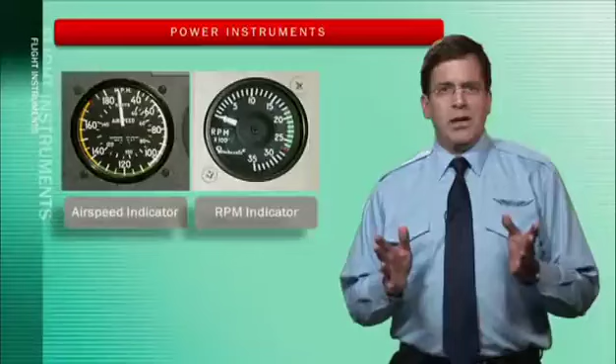The pitch instruments are the airspeed indicator, the altimeter, plus the attitude indicator and the vertical speed indicator. The bank instruments consist of the attitude indicator, the heading indicator, the turn coordinator, and the magnetic compass. The power instruments include the airspeed indicator, the tachometer, and the manifold pressure gauge.

The instruments which provide the best information for controlling the aircraft in any given maneuver are referred to as primary instruments. These are usually the instruments that should be held at a constant indication, meaning you look at these first. The remaining supporting instruments should help maintain the primary instruments at the desired indications and be used as backup.

When climbing and descending, it's necessary to begin level off in enough time to avoid overshooting the desired altitude. The amount of lead to level off from a climb varies with the rate of climb and pilot technique. If the aircraft is climbing at 1,000 feet per minute, it will continue to climb at a decreasing rate throughout the transition to level flight.

An effective practice is to lead the altitude by 10% of the vertical speed. 500 feet per minute would have a 50-foot lead. 1,000 feet per minute would have a 100-foot lead.

The amount of lead to level off from a descent also depends upon the rate of descent and the control technique. To level off from a descent at descent airspeed, lead the desired altitude by approximately 10%. For level off at an airspeed higher than descending airspeed, lead the level off by approximately 25%.

When making initial pitch attitude corrections to maintain altitude during straight and level flight, the changes of attitude should be small and smoothly applied. As a rule of thumb for airplanes, use a half bar width correction for errors of less than 100 feet and a full bar width correction for errors in excess of 100 feet.

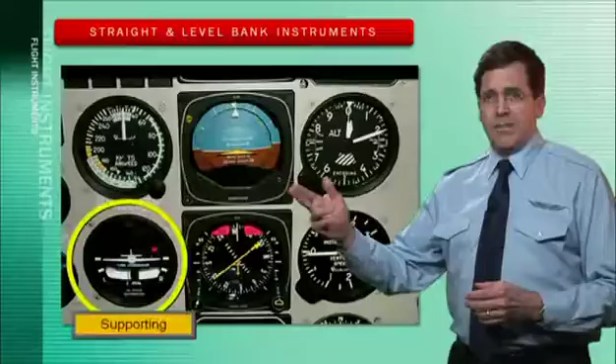The next one we've got is our straight and level bank instruments. For straight and level bank instruments, primary is our heading indicator, and supporting would be our attitude indicator and our turn and bank coordinator. Let's take a look at another one.

The next one we've got is straight and level for power instruments. In this case, primary would be our airspeed indicator, and supporting would be our power instruments, manifold pressure and RPM. Our next scenario is straight and level summary.

In the summary, we have two columns, primary and supporting. Primary for pitch is altimeter, supporting for pitch is attitude indicator and VSI. Primary for bank is the heading indicator, and supporting for bank is the turn coordinator and the attitude indicator. Primary for power is the airspeed indicator, and supporting for power is manifold pressure and RPM.

Okay, here we've got another scenario. We're talking about changing airspeed straight and level pitch instruments. Primary is our altimeter, and our secondary is our vertical speed indicator and our attitude indicator.

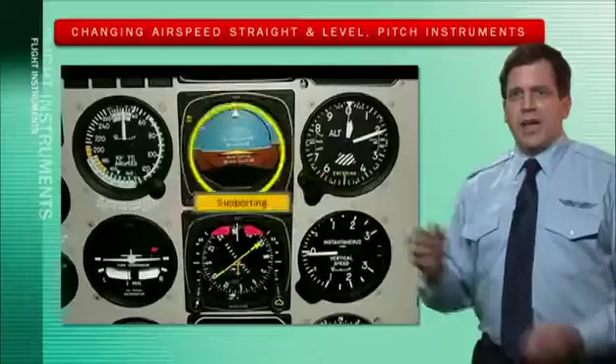In our next scenario, we'll take a look at changing airspeed straight and level bank instruments. Our primary is our heading indicator, and our supporting is going to come from our attitude indicator and our turn and bank coordinator. In a new scenario, we'll take a look at this one that's coming up, and we're going to look at changing airspeed straight and level.

Manifold pressure and RPM are primary for changing airspeed straight and level in our power instruments, and our supporting information comes from our airspeed indicator.

Now take a look at this summary. For changing airspeed straight and level, again we have our two columns, primary and supporting. Primary for pitch is altimeter, and supporting for pitch is attitude indicator and VSI. Primary for bank is our heading indicator, and supporting for bank is our turn coordinator and our attitude indicator. Primary for power is manifold pressure and RPM, and supporting for power is our airspeed indicator.

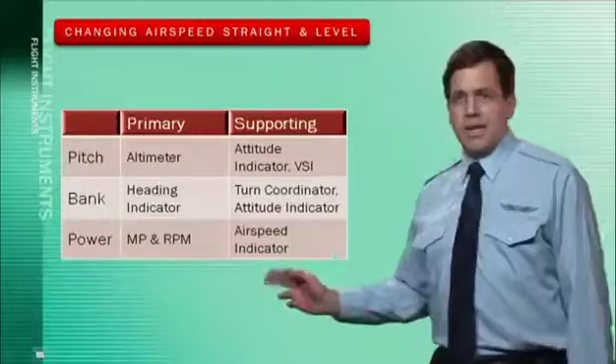Our next scenario is add power and enter constant airspeed. Pitch instruments: primary is from our attitude indicator, and supporting information comes from our airspeed indicator and from our vertical speed indicator. For bank instruments, primary comes from our heading indicator, and support comes from our turn coordinator.

Next scenario: add power and enter constant airspeed with power instruments. Primary comes from manifold pressure and RPM, and supporting comes from our airspeed indicator.

Summary for add power and enter constant airspeed, primary and supporting columns. Primary pitch comes from the attitude indicator, supporting pitch from airspeed and VSI. Primary bank comes from our heading indicator, supporting bank from our turn coordinator. Primary power comes from manifold pressure and RPM, and supporting power comes from our airspeed indicator.

In this scenario, we've got stable airspeed, climb and descent, pitch instruments. The primary information comes from our airspeed indicator. Supporting information comes from our vertical speed indicator and from our attitude indicator.

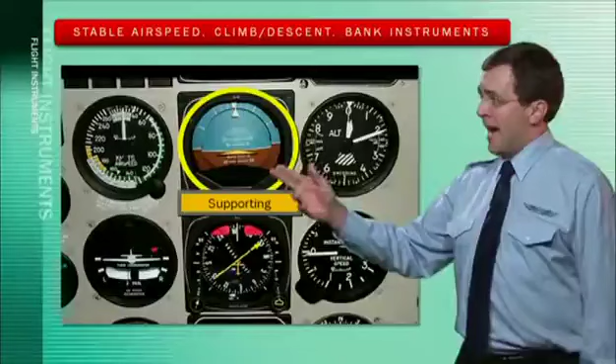Next, stable airspeed, climb and descent, bank instruments. Our primary comes from our heading indicator. Our supporting information comes from our attitude indicator and from our turn coordinator.

Let's take a look at stable airspeed, climb and descent, power instruments. The primary information comes from manifold pressure and from RPM, and our supporting information comes from our airspeed indicator.

Summary of stable airspeed, climb and descent, primary and supporting. Primary for pitch is airspeed indicator, supporting for pitch is attitude indicator and VSI. Primary for bank is our heading indicator, supporting for bank is our attitude indicator and turn coordinator. Primary for power is manifold pressure and RPM, and supporting for power is our airspeed indicator.

Now we've got another scenario: entering constant rate climb and descent, pitch instruments. Primary comes from our airspeed indicator, and supporting comes from our attitude indicator, also from our vertical speed indicator.

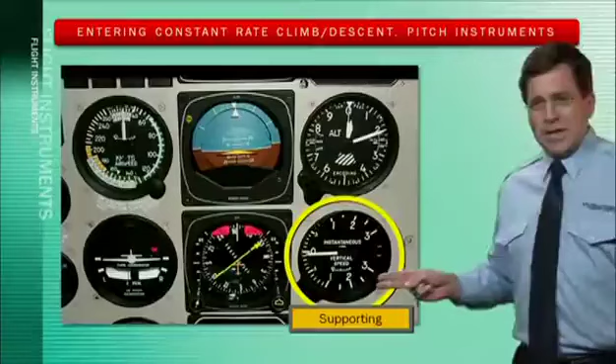In this section, entering constant rate climb and descent, bank instruments. Our primary has to come from our heading indicator, and support has to come from our attitude indicator and from our turn coordinator.

Now we're taking a look at entering constant rate climb and descent, power instruments. Our primary is manifold pressure and RPM, and our supporting information comes from airspeed indications.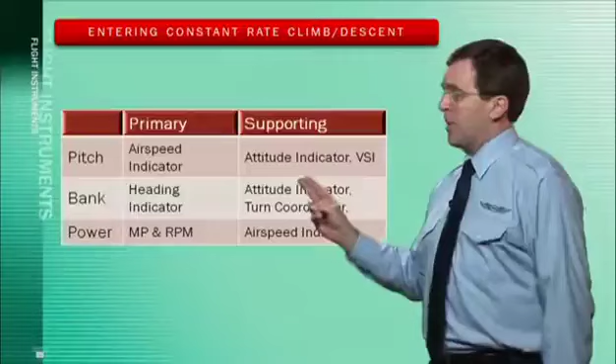Summary for entering constant rate climbs and descents. Our primary information for pitch comes from our airspeed indicator, and our supporting information comes from our attitude indicator and VSI. Our primary bank information comes from our heading indicator, and supporting bank information comes from our attitude indicator and turn coordinator. Our primary power information comes from manifold pressure and RPM, and our supporting power information comes from our airspeed indicator.

In this scenario, we're taking a look at stable rate climb and descent, pitch instruments. Our primary information comes from our vertical speed instrument, and our supporting information comes from our attitude indicator.

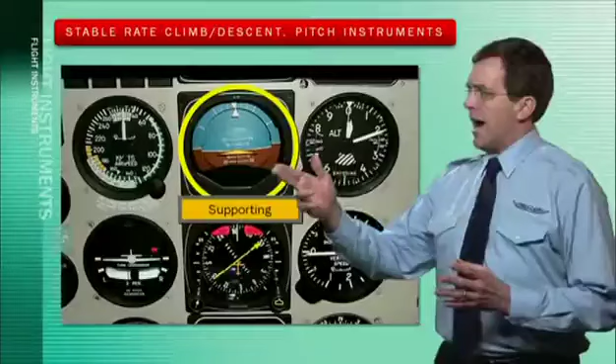In stable rate climb and descent, bank instruments, primary information comes from our heading indicator, and our supporting information comes from our attitude indicator, also from our turn coordinator.

In stable rate climb and descent, power instruments, the primary information comes from our airspeed indicator, and our supporting information comes from manifold pressure and from our RPM.

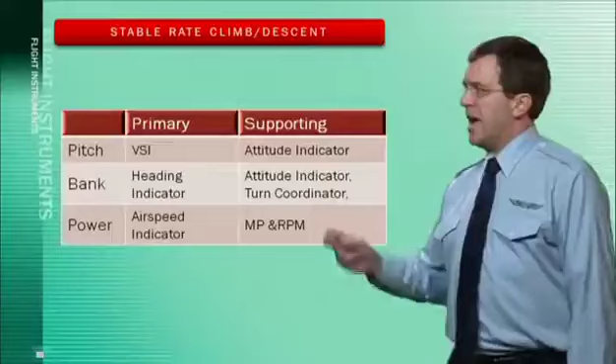Summary for stable rate climb and descent: primary for pitch is VSI, supporting for pitch is attitude indicator. Primary for bank is the heading indicator, and supporting for bank is attitude indicator and turn coordinator. Primary for power is our airspeed indicator, and supporting for power is manifold pressure and RPM.

Now in this scenario, we have transition to standard rate turn, pitch instruments. Our primary information comes from our altimeter, and our supporting information comes from our attitude indicator and also from our vertical speed indicator.

In our next scenario, transition to standard rate turn, bank instruments, primary information comes from our attitude indicator, and supporting information comes from our turn coordinator.

Transition to standard rate turn power instruments: our primary information comes from our airspeed indicator, and our supporting information comes from manifold pressure and RPM.

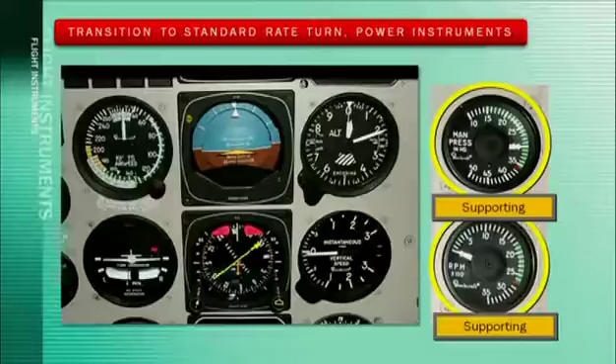Again, we have another summary. In transitioning to standard rate turn, primary information for pitch is from the altimeter, supporting information for pitch is from the attitude indicator and VSI. Primary information for bank comes from our attitude indicator, and supporting information for bank comes from our turn coordinator. Primary information for power comes from our airspeed indicator, and supporting information for power comes from our manifold pressure and RPM.

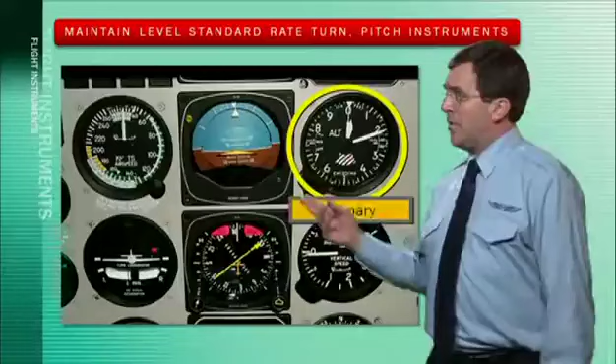In this scenario, we're talking about maintaining level standard rate turns. Pitch instruments: primary information comes from the altimeter, and secondary or supporting information will come from the attitude indicator here and from the vertical speed indicator. In the next component, maintain level standard rate turn bank instruments, primary information comes from our turn coordinator, and supporting information comes from our attitude indicator here.

And now we'll take a look at power, maintain level standard rate turn power instruments. The primary information comes from our airspeed, and our supporting information comes from manifold pressure and from RPM.

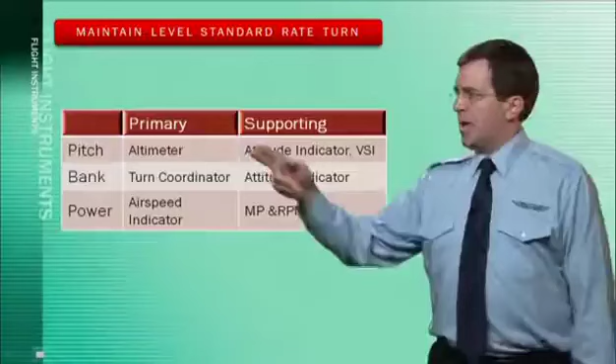In the summary for this section, maintaining level standard rate turn, primary information for pitch comes from the altimeter, and supporting information for pitch comes from the attitude indicator and VSI. Primary bank information comes from the turn coordinator, and supporting bank information comes from the attitude indicator. Primary information for power comes from your airspeed indicator, and supporting information for power comes from manifold pressure and RPM.

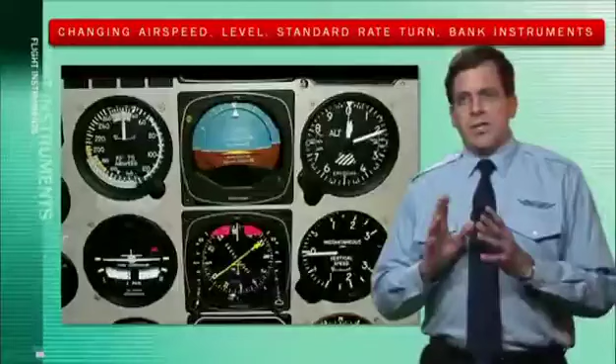In another scenario, we're going to take a look at changing airspeed, level, standard rate turn, our pitch instruments first. Primary information comes from our altimeter, and supporting information comes from our attitude indicator and from our vertical speed indicator. Changing airspeed, level, standard rate turn bank instruments: primary information comes from our turn coordinator, and supporting information comes from our attitude indicator. And we're going to take a look now at changing airspeed, level, standard rate turn power instruments. Primary information comes from manifold pressure and from RPM, and supporting information comes from our airspeed indicator.

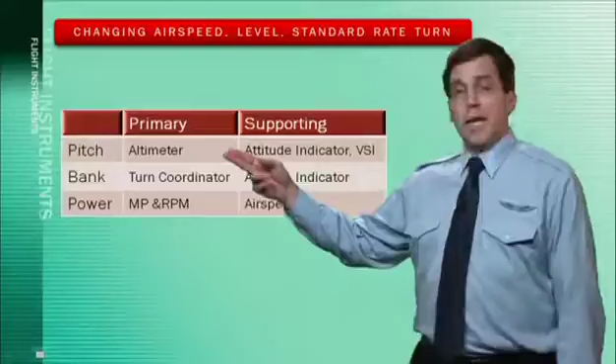In this summary section, changing airspeed, level, and standard rate turns, primary information for pitch comes from the altimeter. Supporting information for pitch comes from the attitude indicator and from the VSI. Primary bank information comes from the turn coordinator, and supporting bank information comes from the attitude indicator. Primary power comes from manifold pressure and RPM, and supporting power comes from airspeed.

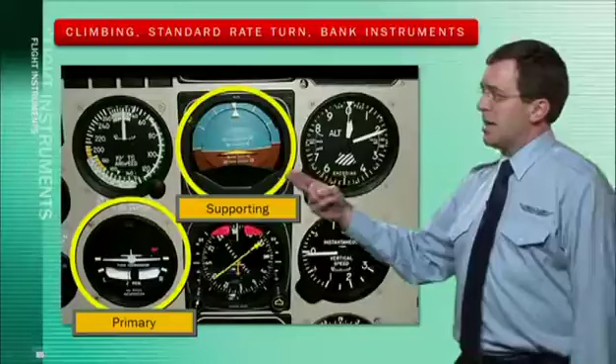In this scenario, climbing standard rate turn pitch instruments, our primary information comes from our airspeed indicator, and our supporting information comes from our attitude indicator here, also from our vertical speed indicator. Climbing standard rate turns bank instruments, we've got it up for you in advance, and the primary information comes from our turn coordinator, and our supporting information comes from our attitude indicator right here. And then climbing standard rate turn power instruments, the primary information comes from manifold pressure and from RPM, and our supporting information comes from our airspeed indicator.

For this summary, we're taking a look at climbing standard rate turn. Our primary pitch information comes from airspeed, and our supporting pitch information comes from the attitude indicator and the VSI. Primary bank information must come from the turn coordinator, and supporting bank information must come from the attitude indicator. Primary power must come from the manifold pressure and RPM, and supporting power must come from the airspeed.

Okay, that's a lot of scenarios. Now, when considering primary and supporting, ask yourself which factors apply. Which will be primary or supporting instruments? Is this a steady state or a transitioning phase? Consider each attitude, i.e. pitch. Which instruments provide pitch information?

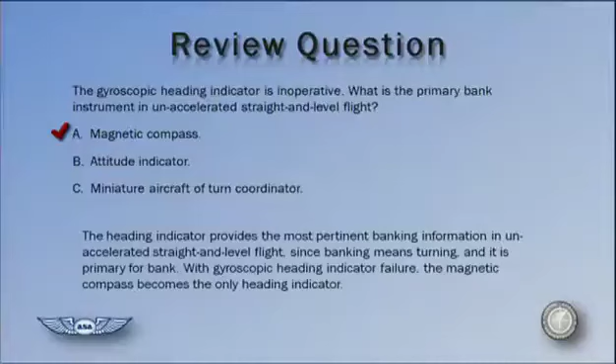Okay, let's take time for another review question. This one: the gyroscopic heading indicator is inoperative. What is the primary bank instrument in unaccelerated straight and level flight? Which of these is correct? Your answer is A, magnetic compass. The heading indicator provides the most pertinent banking information in unaccelerated straight and level flight, since banking means turning, and it is primary for bank. With gyroscopic heading indicator failure, the magnetic compass becomes the only heading indicator. All right, let's move along.

And our final topic in this lesson, unusual attitudes. Let's get back with your instructor in the classroom for that one. When recovering from an unusual attitude without the aid of the attitude indicator, approximate level pitch attitude is reached when the airspeed indicator and altimeter stop moving and the vertical speed indicator reverses its trend.

We'll begin with this scenario. Now, here are the attitude indications for nose high and climbing conditions and nose low and diving conditions. The following procedure is used to recover from a nose low attitude. Number 1, reduce power. Number 2, level the wings. And number 3, raise the nose to the horizon in level attitude.

The following procedure is used to recover from a nose high attitude. Number 1, add power. Number 2, apply forward elevator pressure. And number 3, level the wings. Finally, here is an attitude indicator displaying level flight. The altimeter rate has slowed. The airspeed change has slowed, and the VSI direction is reversed.

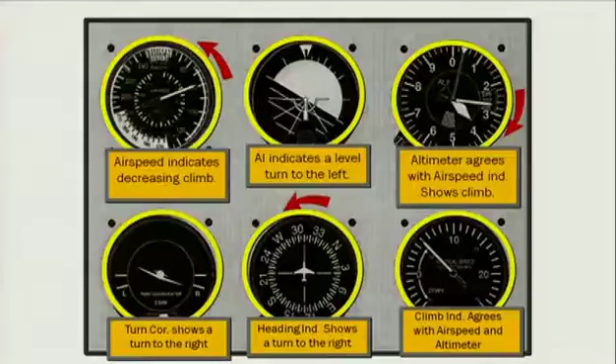The attitude indicator indicates a level turn to the left. Our airspeed indicates a decreasing climb. Altimeter agrees with airspeed indicator showing a climb. The climb indicator agrees with the airspeed and the altimeter. Turn coordinator shows a turn to the right, and the heading indicator shows a turn to the right. So which of these has failed? Well, the attitude indicator has failed.

Going back to our question to determine the answer, what is the flight attitude? A climbing turn to the right. You're in a right climbing turn, thus we showed that the attitude indicator has failed. Okay, next up. Again, we'll ask you to refer to a figure. What is the correct sequence for recovery from the unusual attitude indicated? Okay, let's take a look at that figure for you.

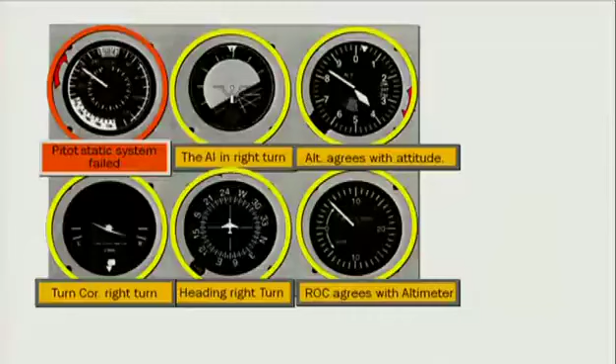Here we have it. Now our attitude indicator shows a right turn. Our altimeter agrees with the attitude indicator. The rate of climb agrees with the altimeter. Heading shows right turn. Our turn coordinator shows right turn, which means the pitot-static system has failed. Too much airspeed there. In order to correct that, what do we do? 1, add power, 2, lower the nose, and 3, level the wings.

So if we go back to our original question to ascertain the answer, well, it's B. Add power, lower nose, level wings, return to the original attitude and heading. Well, there you have it for lesson number 3.

Next up, what kind of backup instrumentation do technically advanced aircraft use should the screens go black? Well, these technically advanced airplanes typically offer 3 conventional style gauges. It's an airspeed indicator, an attitude indicator, and an altimeter. The one thing I'd recommend to any pilot is get lots of regular practice using these things. Everyone thinks, well, these new systems are practically fail-safe, and they only fail in 1 in 10,000 cases. But the thing you have to keep in the back of your mind is, what if on some occasion you were today's lucky winner? So get lots of practice using everything in the cockpit.

Very good. Now, with no physical moving parts or electrical circuits to follow, how should a pilot go about getting familiar with the systems that are associated with cockpit automation like GPS? Well, I see 2 challenges here. One is mastering what I call the knobology, just learning what button pushes and dials are required to use the thing. And that's something that just takes a little bit of practice. After a few hours, your fingers know the way around the cockpit.